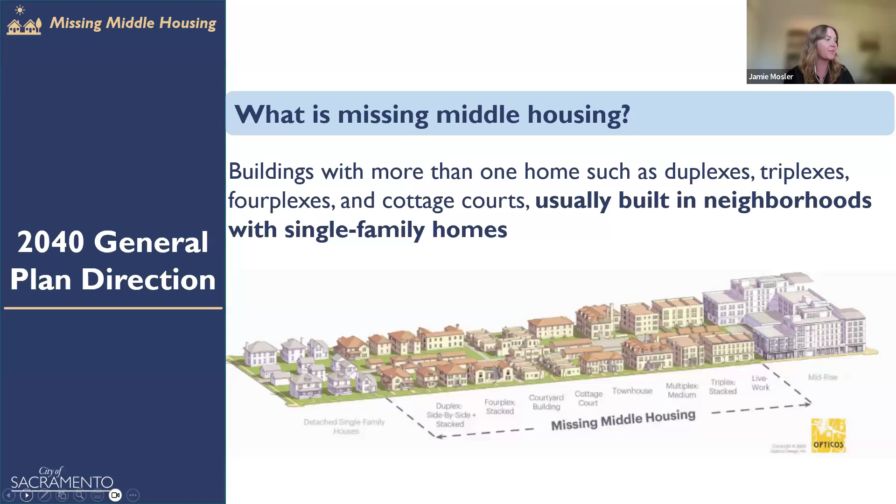We had an interim ordinance to allow missing middle housing that was adopted by City Council in summer of 2024. It was adopted as a temporary step before a complete code update, which we're at now. This ordinance allows duplexes, multi-unit dwellings, and smaller lot sizes in those single unit and duplex zones that I showed on the slide a moment ago.

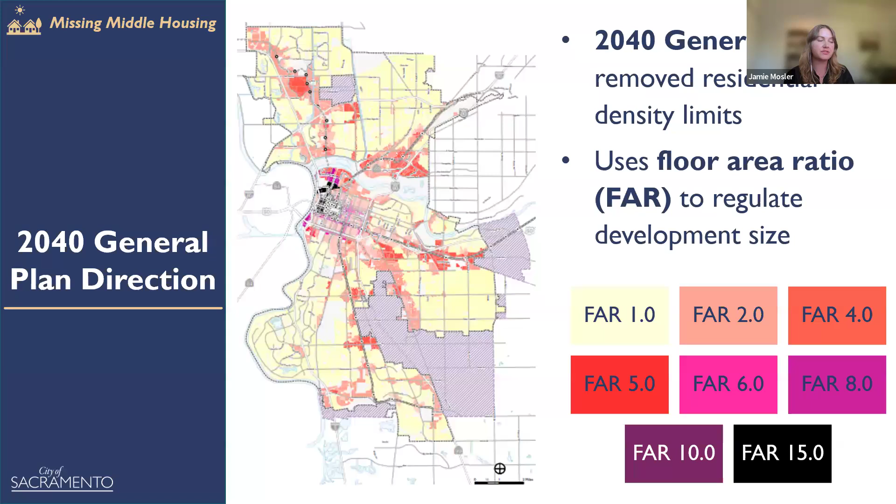But now we're looking at doing updates in line with our 2040 general plan, which removed maximum residential density limits across the entire city. There's no longer a limit on how many houses or units can be built on one lot. The general plan uses floor area ratio instead, so instead of having like one unit per lot, we have FARs ranging from 1 through 15 across the city.

Floor area ratio is building area divided by lot area. So for example, if you had a 5,000 square foot lot with a 5,000 square foot building on that, that would be an FAR of 1. But a 15,000 square foot building on that same lot would be an FAR of 3. So now the general plan regulates the size of the box, not necessarily how many housing units are within it.

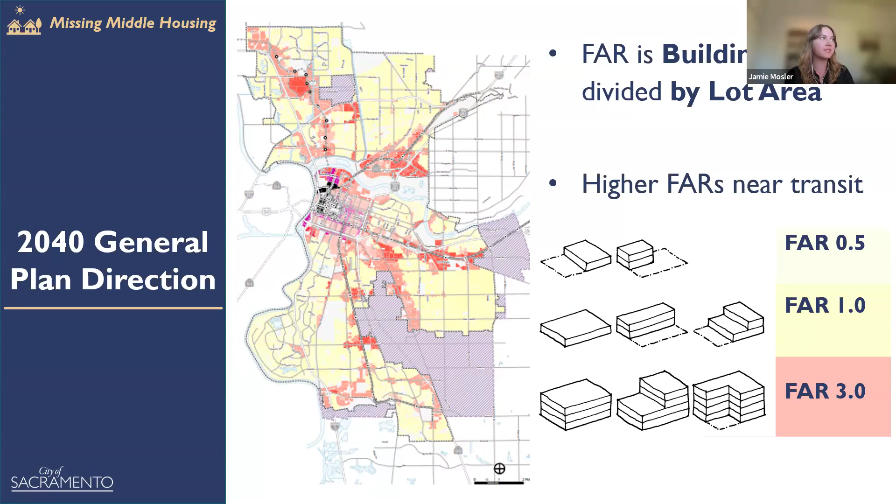The general plan also allows higher FARs near transit. You'll see the lighter colors are further from transit, that light yellow, and our darker colors are along where the light rail is and getting closer to downtown. So higher development intensity is associated with transit.

But when we look at missing middle housing in the areas we'll be talking about tonight, we're looking at parcels that have either a max FAR of 1, mapped there with all of those yellowish parcels on the left—there's about 100,000 of them—and then we're also looking at parcels with an FAR of 2. There's about 20,000 of those, located closer to transit where they have the higher FAR.

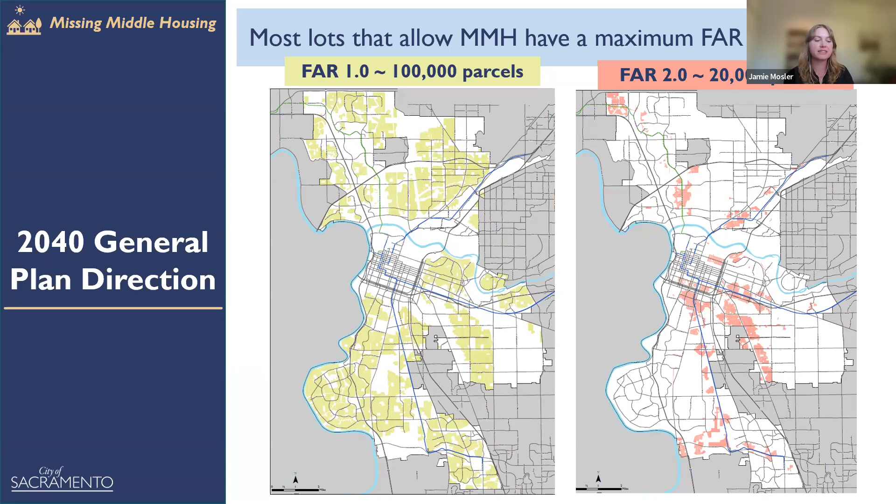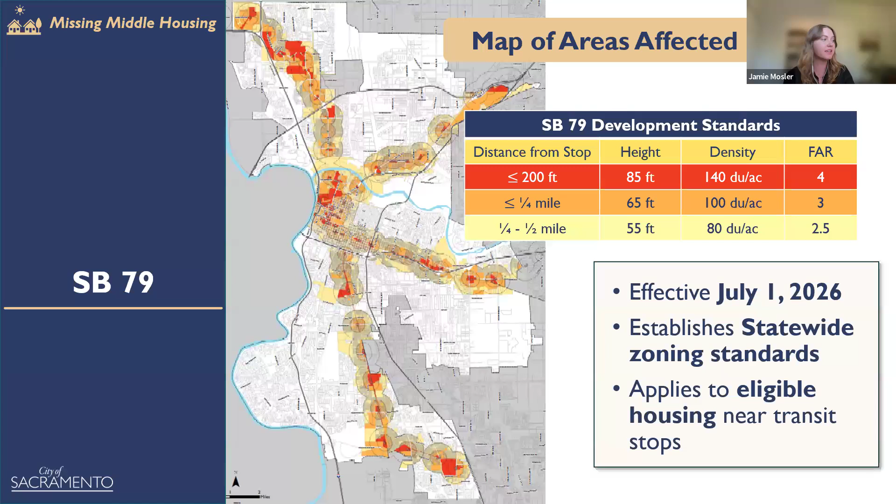The project has to be housing or mixed use with at least 5 units, has to meet minimum density standards, comply with an average unit size, and sometimes affordability and labor standards apply as well. So we're taking direction from our general plan to increase intensity near transit, but also to broaden the range of housing types, and also looking at new state legislation.

We had a workshop with City Council back in April, and now with their direction, we are working on updating our missing middle housing standards to balance neighborhood scale, but also to focus growth near transit and create more housing opportunities in those areas. And with that, I'll turn it over to Tony Perez from Opticos to walk us through the draft standards we've been developing so far.

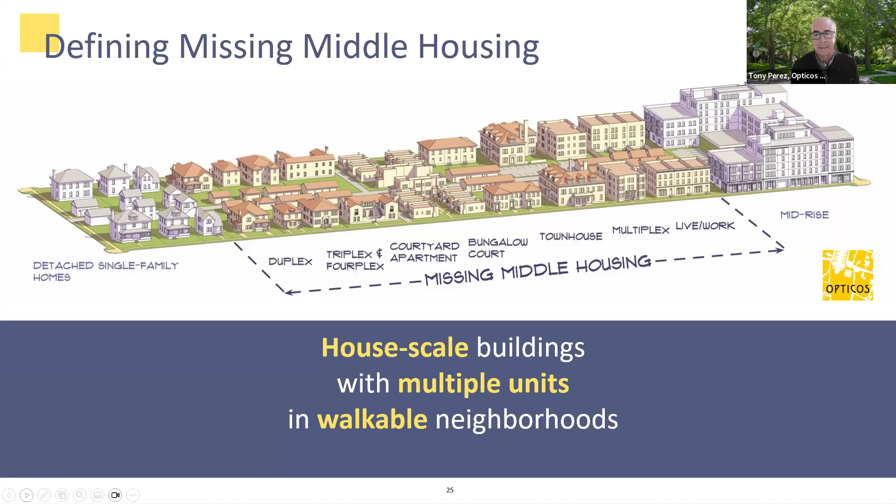And this isn't new. If you're sitting there saying, well, I've seen this, I just saw some examples that Jamie showed from Sacramento that predate all of these discussions, you're absolutely right. We're not saying it's new. What is new, unfortunately, is getting these types to be allowed again across the country, and allowed predictably and easily.

One of the things that missing middle housing is really known for is that it's always been part of neighborhoods. And in being part of neighborhoods, it's often hard to tell if there are 2 or more units in that building, because they're part of neighborhoods that have single unit houses. So here you're looking at 3 mailboxes or 4 water meters or gas meters showing you that there are multiple units in that building. But otherwise, walking along the street, you'd say it looks like a big house.

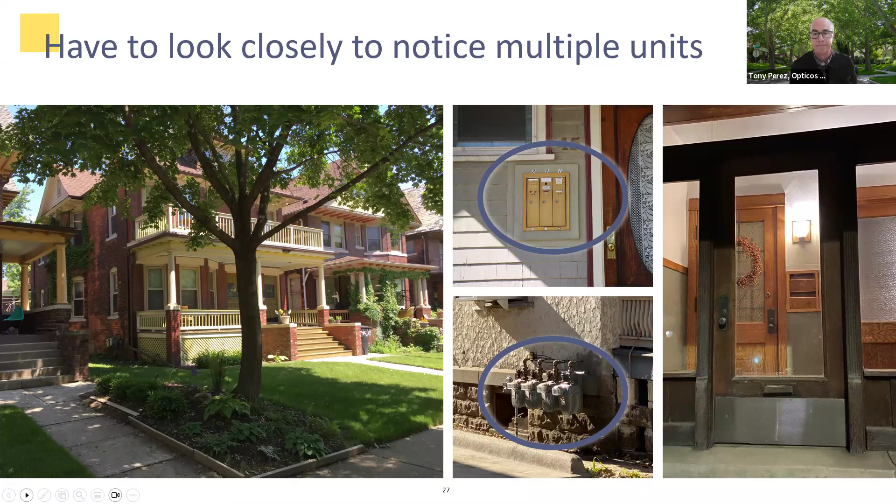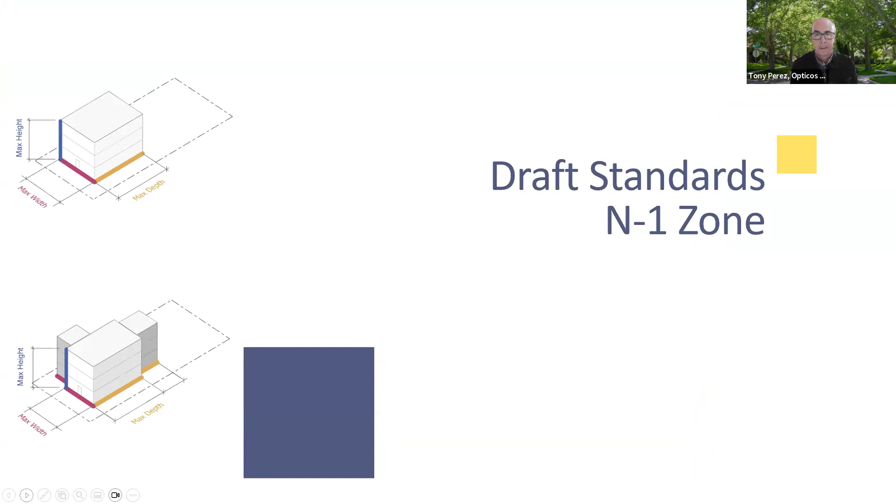One of the things when we approach writing standards is, instead of focusing on numbers and all the abstract things you can focus on, as a team we've reversed that process. Based on the public input received so far and the direction from City Council, what is it that people are looking for besides more housing, and in what forms, shapes, and sizes? So we started with that and then worked out the numbers that supported those outcomes.

An example of an outcome like that is this multiplex. It's a 3-story sixplex that fits in this neighborhood.

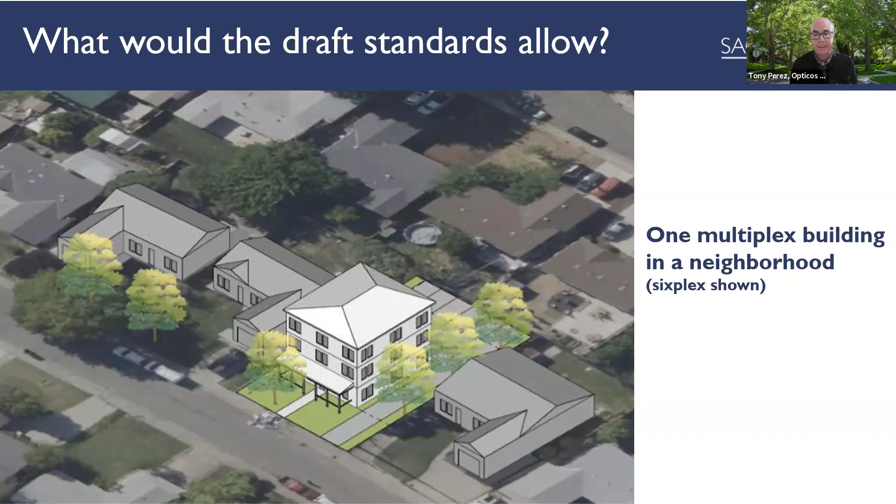Here's a version in a 1.0 FAR area. The previous one was also a 1.0 FAR area, and this one is 6 single-story cottages, as I was mentioning earlier in that cottage court type, with a 2-story duplex at the far end of the garden. This produces 8 units on that lot.

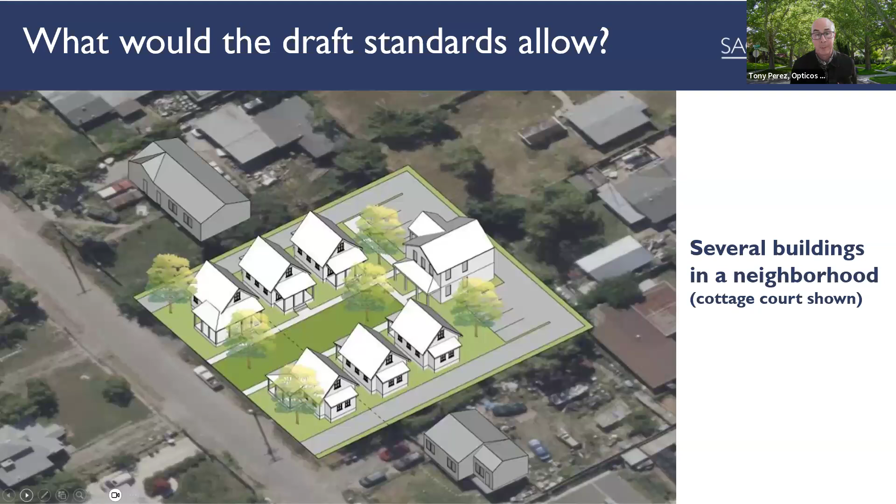Then in the 2.0 areas, there is a lot more floor area to achieve and more housing expected to be achieved in those areas near transit. So in this case, we are showing a 4-story building, and you can see how its width is similar to the buildings I've been showing you, but its depth is much deeper, as I was mentioning in the upper missing middle. They're deeper into the lot.

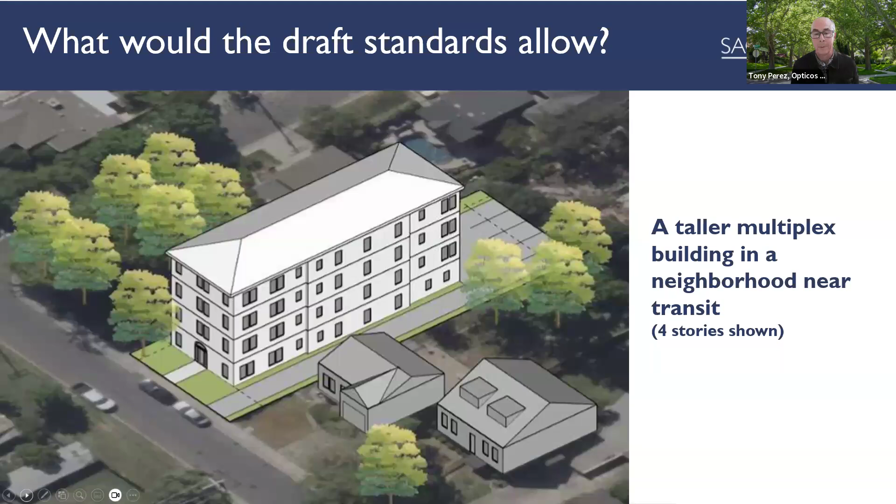Looking at these closer, the first one, the 1.0 area sixplex, a three-story sixplex, you can see the interim ordinance standards on the left. The three examples I'm going to show you: the interim ordinance currently in effect is in the left-hand column, the proposed N1 standards are in the middle column, and what you're looking at on screen is reflected in the shown column. So when you study this information later at your own leisure, you can use this structure to look at it. You can see here that in this example, the height is not changing.

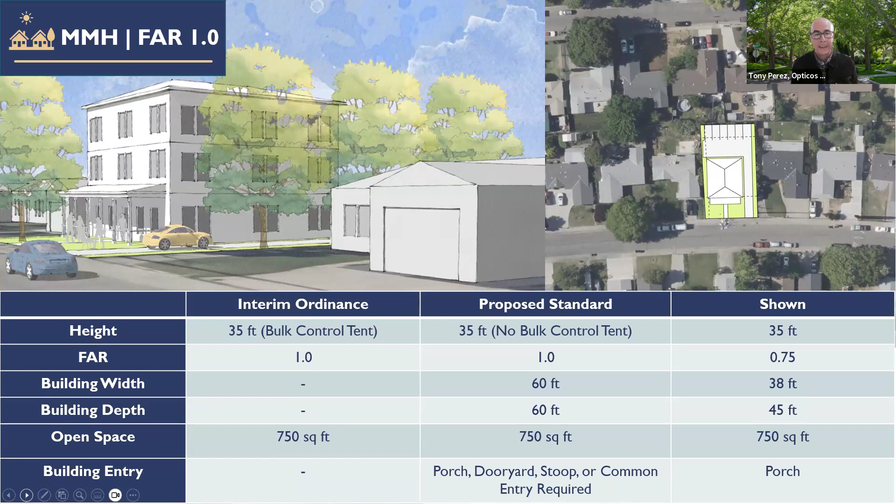But the bulk control that currently is in the interim ordinance is being removed, and so the building is able to achieve 3 stories fully without any hindrances to the floor area, and it can produce 6 nice units in that building with parking in the rear, as you can see on the site plan there. It also has open space in the front in the form of a front yard, with a porch added as a feature.

In this one, this is a version of the cottage court I showed you earlier, but it's 2-story cottages around the entire garden as opposed to single-story cottages. You can do either one or mix them. We're just showing it for variety. But again, the height in these areas is not changing, but the bulk control is being removed.

So these buildings can function as complete buildings without any hindrance from bulk control. You can see that the height these buildings need to do that is well within the 35 feet that's allowed by the interim ordinance and the proposed standards. And you can also see that the open space required in the proposed column is far exceeded in this actual example because of how the garden is oriented on the site.

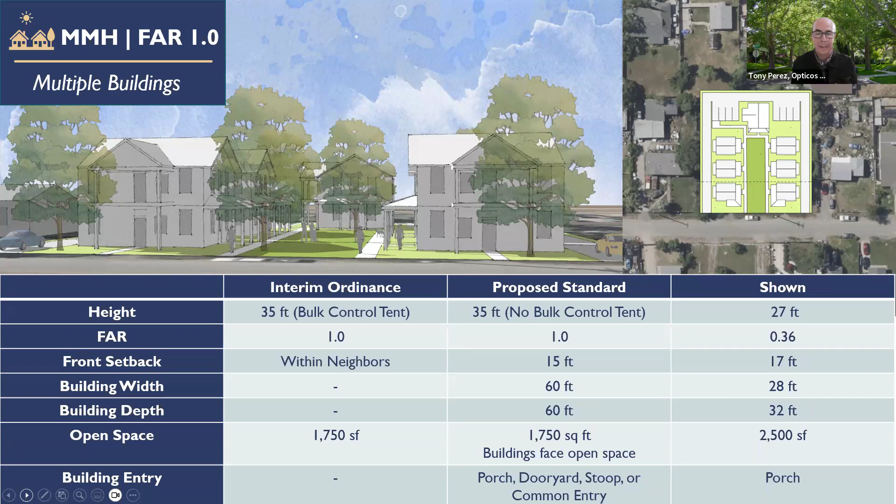Then the third example, that 2.0 area building, this building is enjoying more height because the interim ordinance currently controls it to 35 feet. Again, per council direction to achieve more housing, we are increasing the height in these areas to 45 feet and removing the bulk control requirements.

So this building is able to produce 4 stories and anywhere between 12 and 16 or 18 units, depending on how you divide the square footage inside.

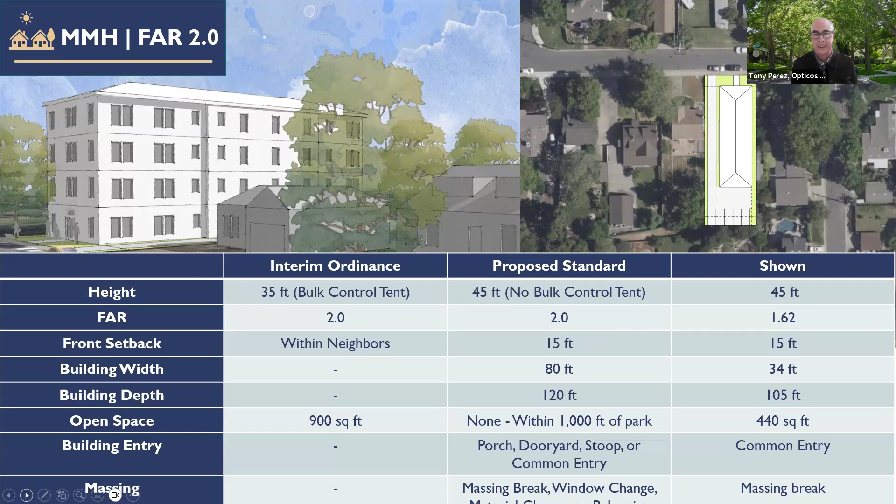And as long as it doesn't exceed 20% of the maximum height, and that's easy to do with that number, the intent is to provide for the ability to have a pitched roof, but not require it.

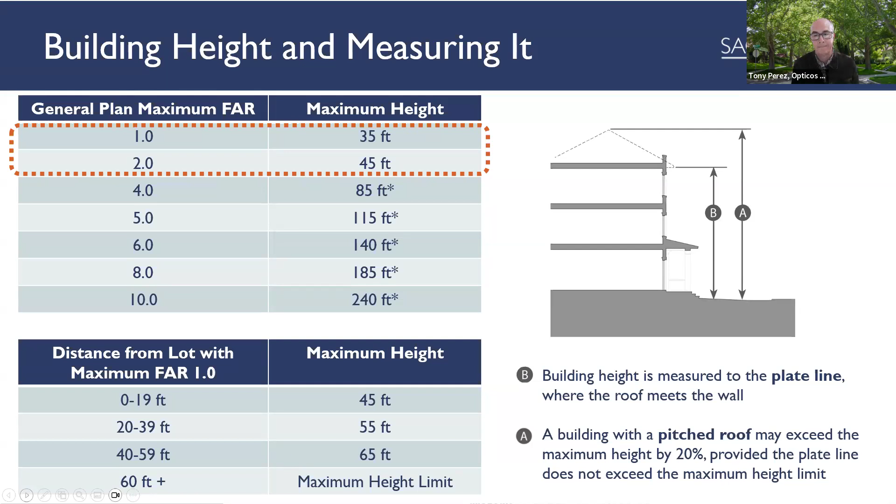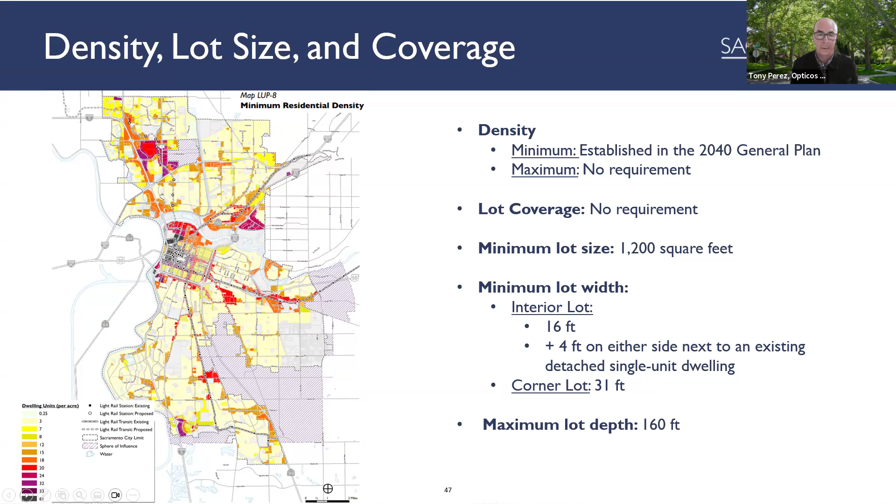As Jamie mentioned, density limits have been removed, lot coverage requirements are removed, and the lot size requirements you can see on the screen. I'd summarize the lot requirements by saying these standards are worked out to function on all the existing lot sizes that exist. It takes a lot more work to make sure that everything works, but that's the way to do it instead of hoping that people assemble properties to make projects work. So these standards work on the properties that exist.

Building setbacks is what we're going to go through next. On the left-hand side, if you're going to build up to 2 units, you can see the setback requirements depending on what exists on that block. But at most, it's going to be a 20-foot setback, which is typical with the houses in most of those neighborhoods where these would be allowed. If you're doing 3 or more units, then it's 15 feet.

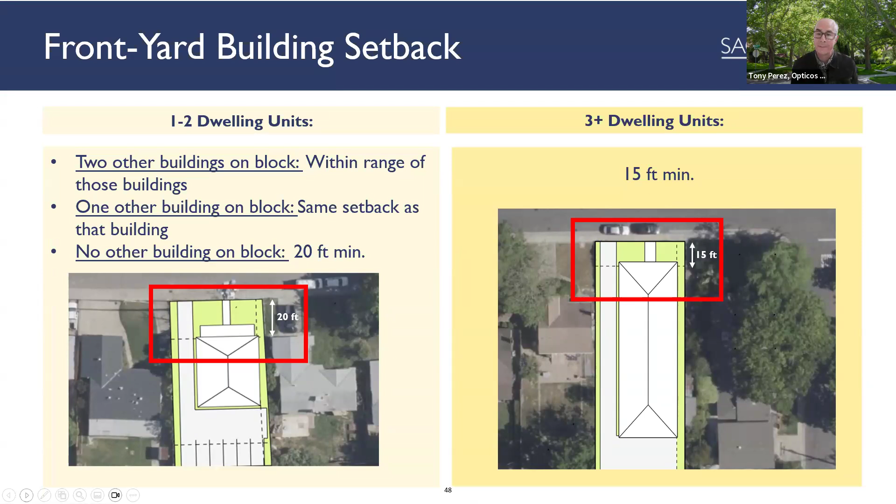Street side yard, that's the side of the lot on a corner lot. You can see here it's 12.5, which is the current requirement, as I understand it.

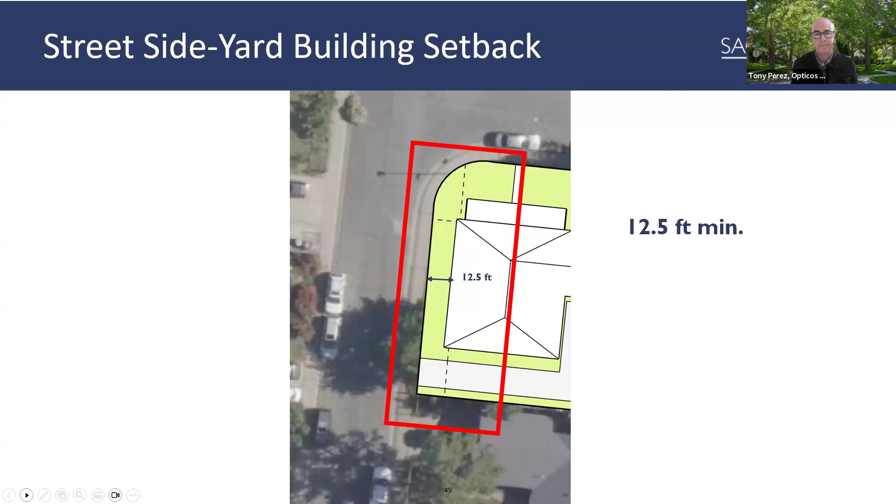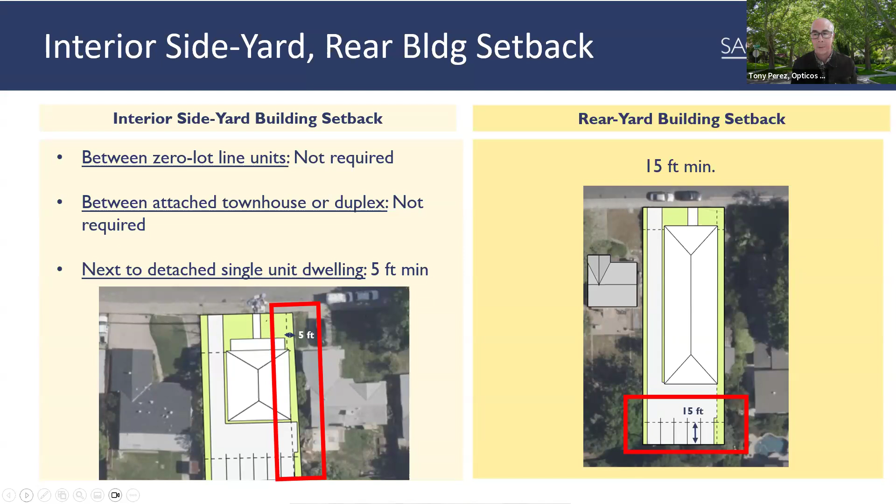Then side yard, interior side yard and rear. In the interior side yard on the left, depending on what you're building and what you're next to, there might not be any requirement, but chances are there's probably a house next door, and if there is, it's a 5-foot minimum setback. The rear setback is simply 15 feet.

So massing, the next area of requirements. The massing requirements for 1.0 areas are very different than the massing areas for 2.0 areas. I'm going to talk about the 1.0 areas first. The idea here is that because these buildings are fitting into neighborhoods of houses where the intensity isn't as great as in the 2.0 areas near transit, the idea is to achieve a neighborhood scale balance in terms of building size, to use the term Jamie used earlier.

One way to do that is to limit the building length in either direction. We've found that 60 feet accommodates a lot of different sizes of buildings that fit on these lots, as you'll see in the slides that follow. As an example, the photo at the bottom left represents a building about 60 feet wide. Could it be 62? Maybe. I didn't measure it exactly, but my recollection is this building is very close to 60 feet wide. So you can see how wide of a building this accommodates, even though the diagrams tend to give a different picture because of just how they were drawn. That's why I included the photo at the bottom left, to show you visibly what a 60-foot wide building looks like.

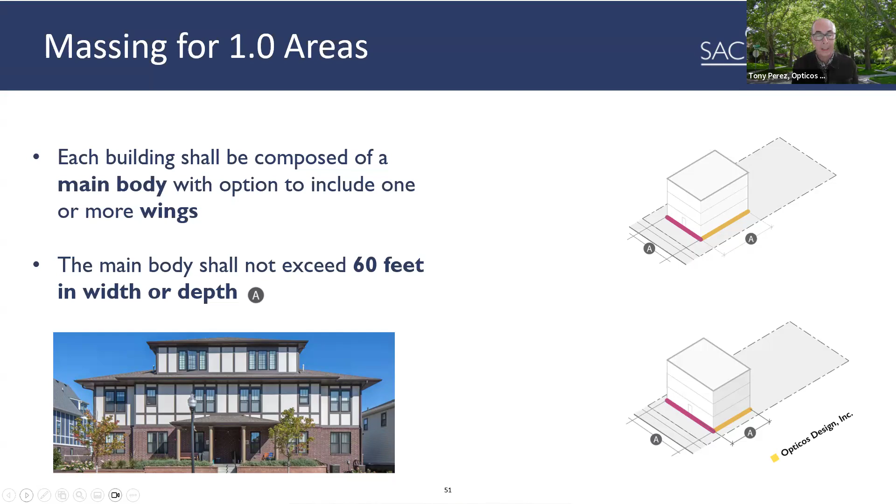As an option, not a requirement, if your lot has more width or depth and can accommodate more than 60 feet, then you have the option of adding one or more wings. Wings are these secondary volumes or additions you can see here in gray in the diagrams. What those let you do is add 1 to 3 more stories in these 1.0 areas, adding more square footage and more units, but doing it in a way where that main body, identified by A, still stands out as the main part of the building. The other parts are offset from the facade by just a few feet, 3 feet, so that the main body reads as the main part of the building and the other part reads as an addition, making for a better neighborhood balance with other buildings in the neighborhood.

The other thing to note on this slide is the last proposed requirement, that all stairways be located inside the building. Regarding the threshold—could it be 16 units, could it be 20 units—we're certainly open to input on all these numbers and all these requirements.

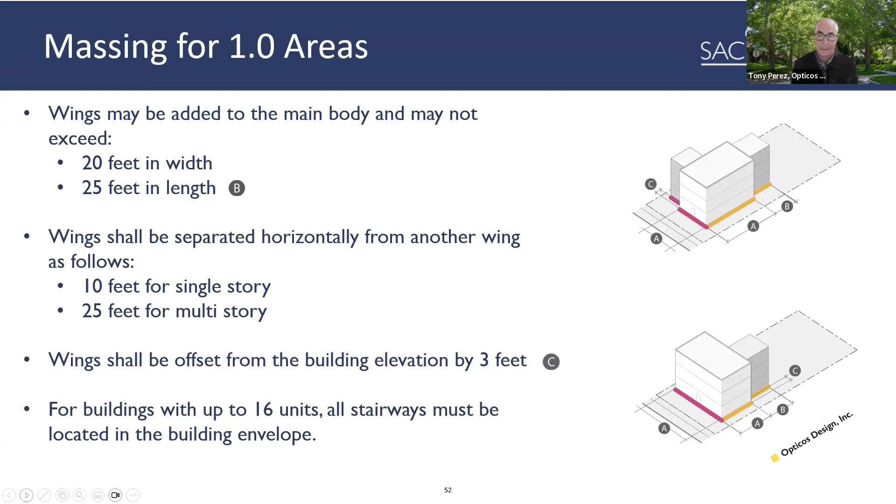The idea is that we've found when fitting buildings into neighborhoods that exterior stairs on the sides and fronts tend to evoke images of apartment building projects that may be nice in other contexts, but in neighborhoods often face resistance because people feel an apartment development is coming, with all the associated number of units and buildings. So we found that requiring stairs to be inside the building does not give that same impression. The buildings we're showing you tonight all have interior stairs. I wanted to give some background on that intent.

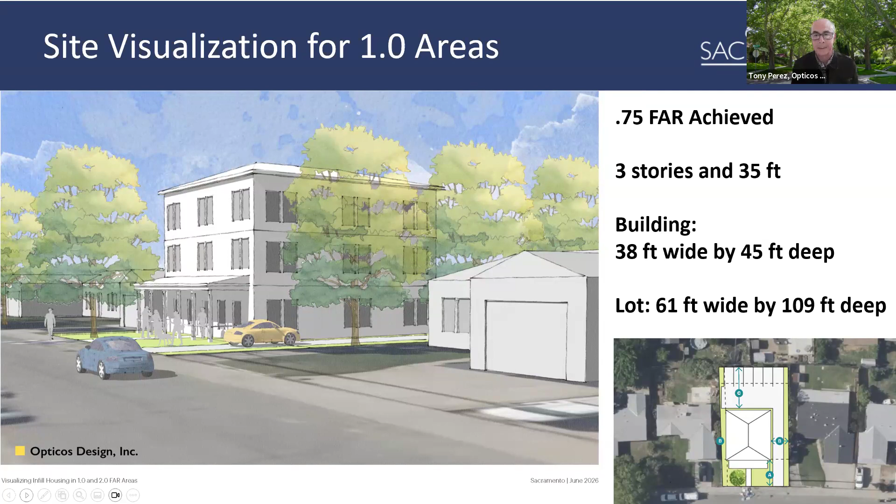Massing in 2.0 areas is very different. The idea in 2.0 areas is to achieve even more housing because these areas are closer to transit, so the expectation is higher in these transit-proximate areas. In these areas, buildings can be much wider than in the 1.0 areas. In 1.0 areas they're up to 60 feet wide; in 2.0 areas they're up to 80 feet wide, and can be up to 120 feet deep, as I mentioned earlier with the upper missing middle category.

One of the standards we're recommending is that buildings over 75 feet long—if your building was 74 feet, you wouldn't have to do what I'm about to describe—but if it's 75 feet or more, up to 80 feet, then one of five massing option choices needs to be applied to the building.

The first one is a massing break: you can either recess into the building or project from it. What's shown here in the area identified by B is a projection of 1 foot by 30 feet long. The idea is that instead of recessing and affecting the floor plan inside and the yield of housing units, a 1-foot projection still works on these narrower lots. It gives you a massing break without hurting the floor plan inside or lowering the yield of housing.

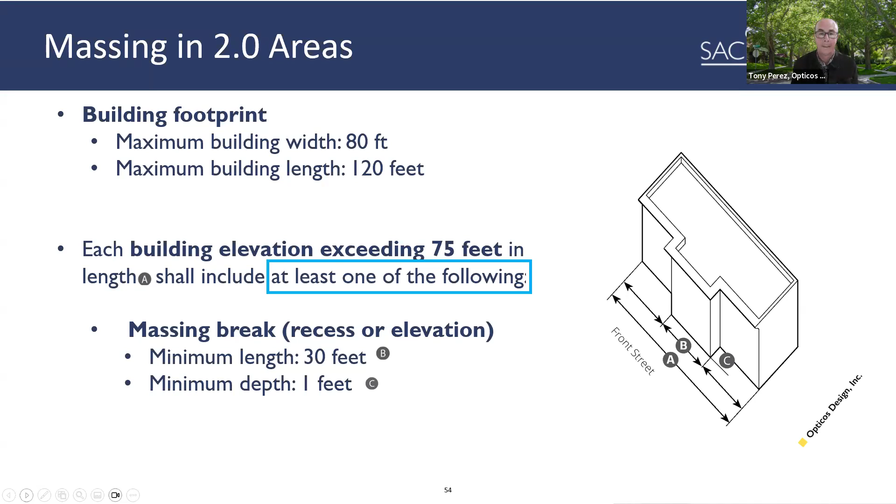So here are 2 more of the 5 options. If you don't want to do the projection or recess I just described, another option is to change the window proportions, or window sizes. You can see in the middle of this diagram the windows are taller and a bit wider than the windows to the left and right. The requirement is just 3 inches—we're showing it larger in the diagram to make it clear for viewers, but it's just 3 inches that's required.

Another option is to recess the windows. You can have all the same windows across the facade, but you need to recess them 3 inches from the main wall.

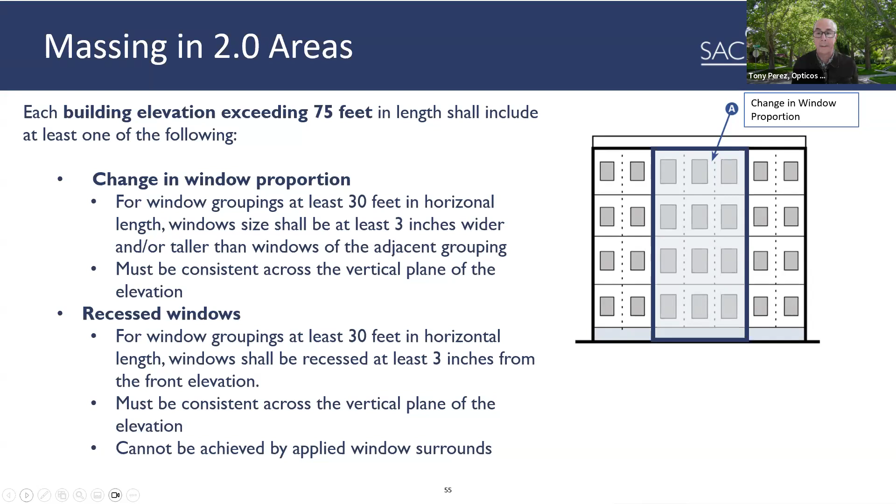The other thing here is that if you want occupiable balconies, where somebody could sit out there and occupy the balcony, then we're recommending that a setback of 10 feet be required so that it would minimize overviewing onto other properties.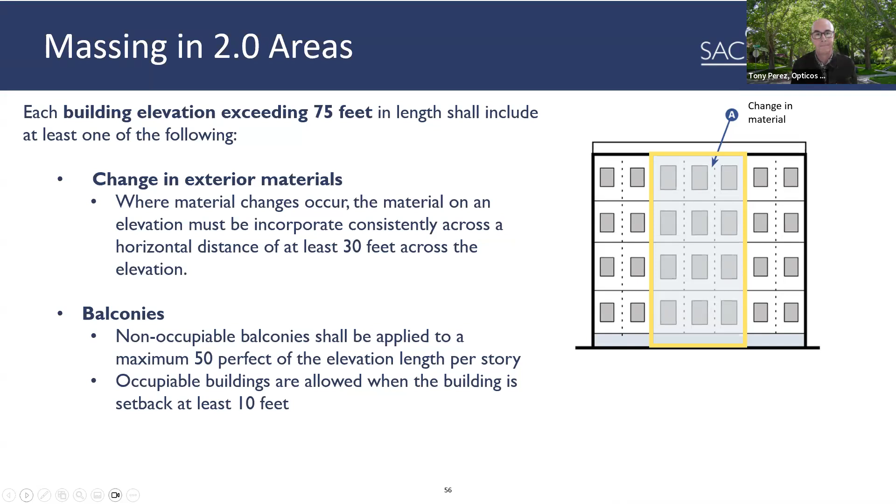So here's a visualization of one of those 2.0 area buildings. You can see how much deeper it is than the first building I was showing you in the 1.0 areas, and obviously 1 story taller with 4 stories. You can see that massing break, that projection of 1 foot applied.

And in this case, we're showing also a change in window proportion as well, even though just one of those two techniques would be required, not both.

But on this lot of 55 feet wide by 160 feet deep, a 1.62 FAR is achieved in 4 stories. And there's parking in the back. You can see surface parking, and then there's tuck under parking in the rear of this building.

More units could be achieved if the developer wanted to divide the square footage a certain way, but we were assuming about 1,000 square feet, somewhere a little under that. So anywhere between 12 and 16 units could fit here comfortably in this building, if not more, depending on unit size. And then balancing the parking - there's no parking requirement, but we have been using the term expected parking in terms of some developers wanting to provide parking. So what might that be? This is a scenario assuming parking spaces at about 0.6 space per unit.

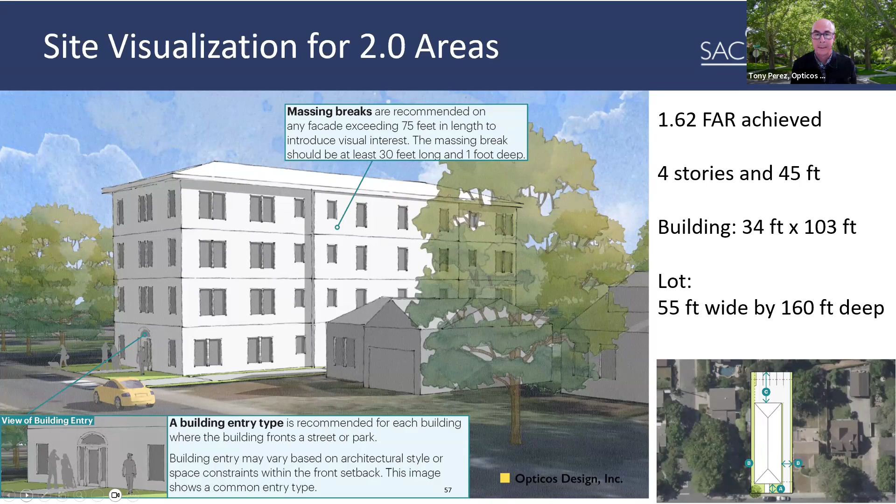So then the next set of requirements is addressing the streetscape or the public realm, as some people call it. These requirements require that at least one entry from the building face a street or required open space. And these standards provide 4 options.

There's the porch, in the top left photo. It can be single story or double story, as in this example.

There's a dooryard, which is another way to say an at-grade patio with a little low privacy fence there to provide the semi-private area in front of each unit facing the street or an open space. Or a stoop, a semi-private area where somebody could put a chair out, hang out there and watch people go by, just a little elevated from the street in exchange for being closer to the sidewalk.

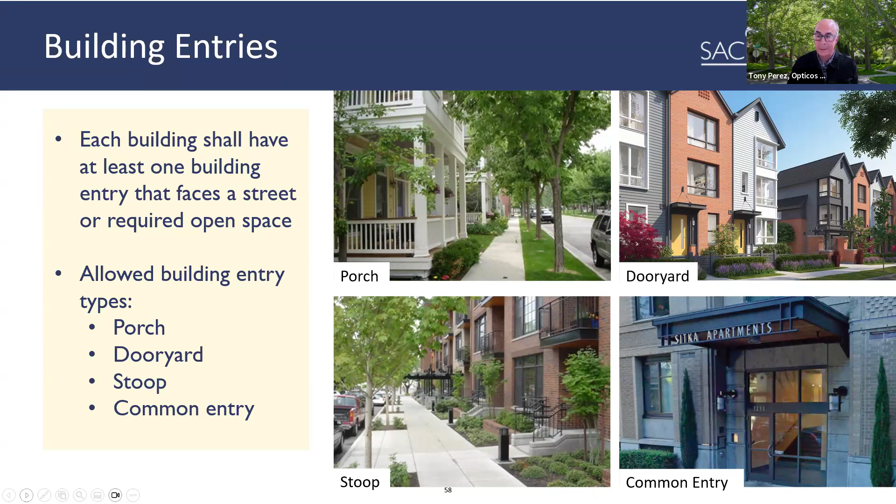And then the fourth one, the common entries. Some buildings, as I was showing you in the last site visualization, use a common entry where all the units are entered through a small lobby and they enjoy this shared entry that gives identity to the building and also gives coverage during bad weather.

The requirements here on the right show the width minimum of 8 feet and the depth clear of 6 feet. The idea is that you can make it bigger if you'd like. Some of the examples I was showing were a little larger, but the idea is that the space be functional to sit in, to be able to hang out there and enjoy the streetscape, which is the point.

Often you've seen these kinds of elements added to buildings without these kinds of requirements, and what happens is the element is added in name but not in function. So people tend to not use those spaces. I mean, would they sit out there anyway if it was shallower? Maybe, I don't know. But they definitely get used when they're sizable enough to have furniture, a chair, or maybe an all-weather sofa out there, encouraging street interaction as well.

A lot of requirements in cities don't distinguish between these elements and the building, so they treat these elements as the building setback. What happens is the whole building gets pushed back into the lot, reducing housing yield. In this case, Sacramento is proposing that that not be counted toward the building, so you can see the area A times B there - the porch, dooryard, or stoop, whatever it is, is actually not counted, and it can project from the building facade, which is at the minimum setback, and it's allowed to project into the required setbacks, as you can see there on the bottom left.

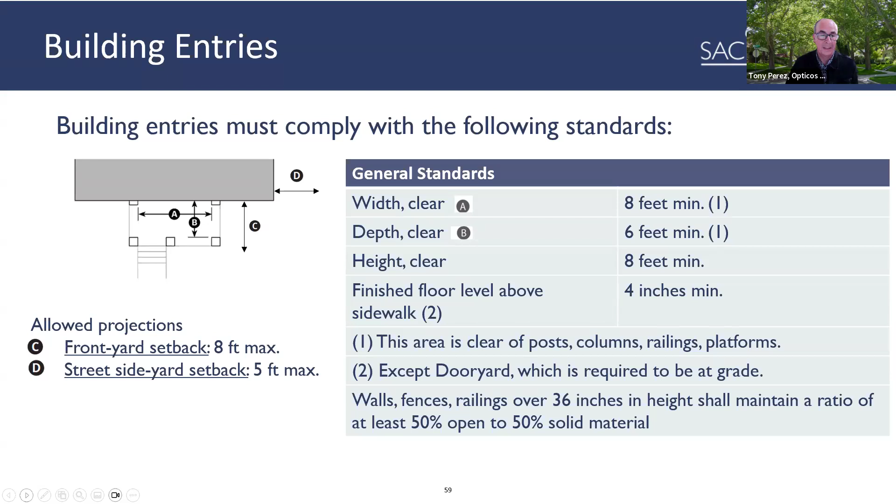Vehicles and parking. The biggest thing here is that we are making a distinction between the needs of circulation and parking on a lot that holds one or maybe two buildings at the most, as you see here on the left, and the needs of parking, circulation, and on-site access for emergency vehicles on a parcel as big as the one on the right.

Often public works and driveway requirements don't make this distinction, so it's very difficult to redevelop smaller lots like the one on the left. City staff is still evaluating these reductions to the driveway width requirements, but it's heading in a good direction to make these distinctions as we're seeing here on the screen.

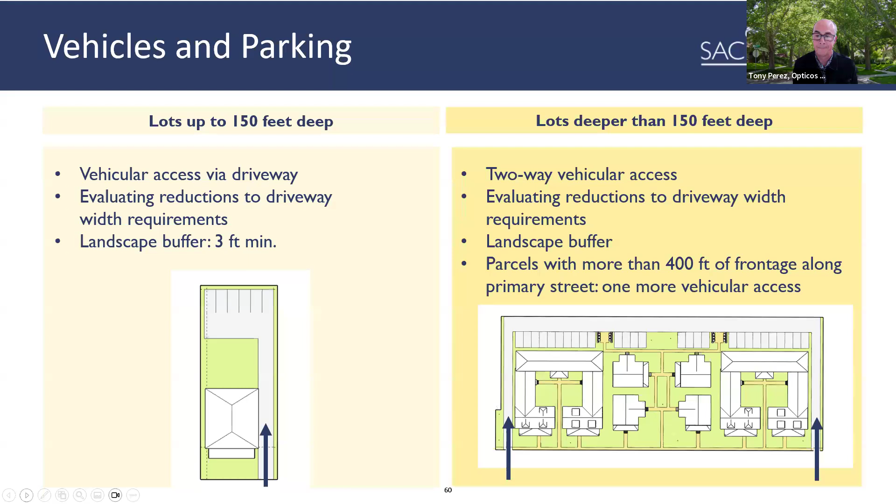So, multiple buildings on a parcel. This is a topic that gets talked about all over the country because, for all the reasons you know about producing more housing, more buildings sometimes fit on a parcel, but they don't always get fitted the best way they could have been to make a nice space and add more to the neighborhood.

The requirements we're proposing basically locate parking away from the street, at least 50 feet from the nearest street. You can see here it's actually in the back. The driveways for this cottage court access the parking in the back, and then the buildings are oriented around a shared space and toward the street. The requirements spell all that out.

Here you can see there are 5 two-story duplexes arranged around this garden, producing 10 units very nicely on this site.

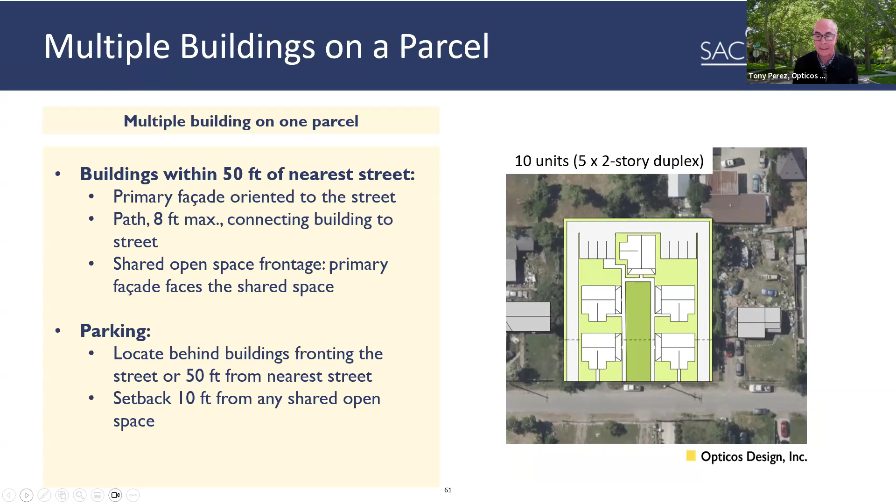Here's one of the outcomes we're trying to avoid, just one of many examples. This isn't in Sacramento, but there are examples like it all over the country where the applicant was entitled to fit these 5 buildings on this parcel, and this is what they did, and they still met the requirements. As I mentioned, one of the key requirements to apply is the location of parking. You can see on the right what the proposed standards would produce, and on the left what they would avoid.

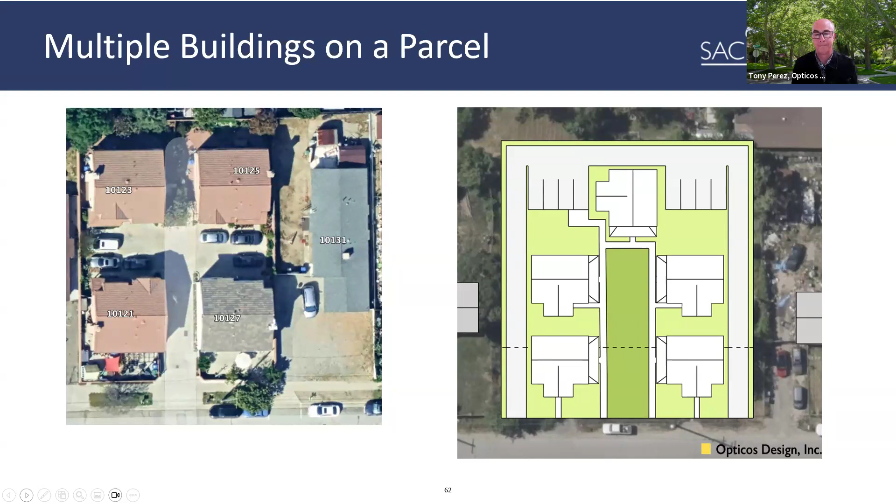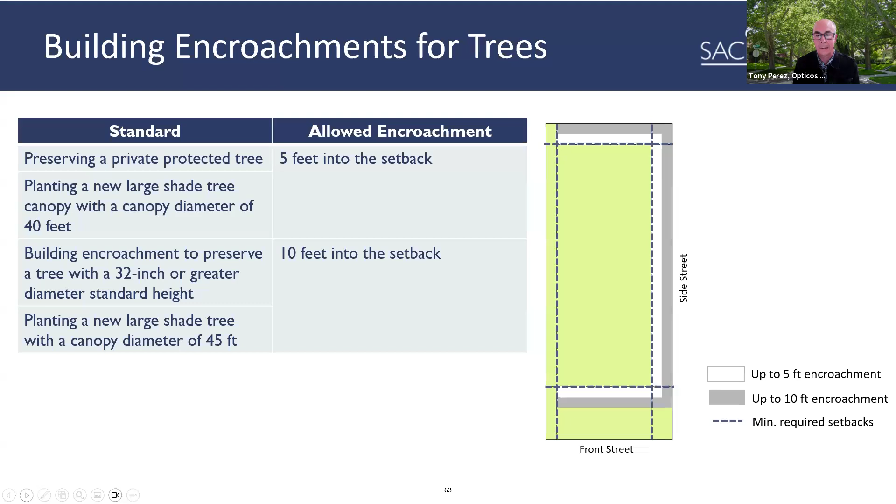So trees - the idea here is to provide flexibility in the standards when a tree of a certain size is being protected. Depending on the size of the tree, or if you're planting a new tree of a certain size, you can encroach a certain amount into the setback, either 5 feet or 10 feet. That's a really nice piece of flexibility that's needed because preserved trees exist in areas where it might not work out to meet all the standards, so this provides flexibility to do that.

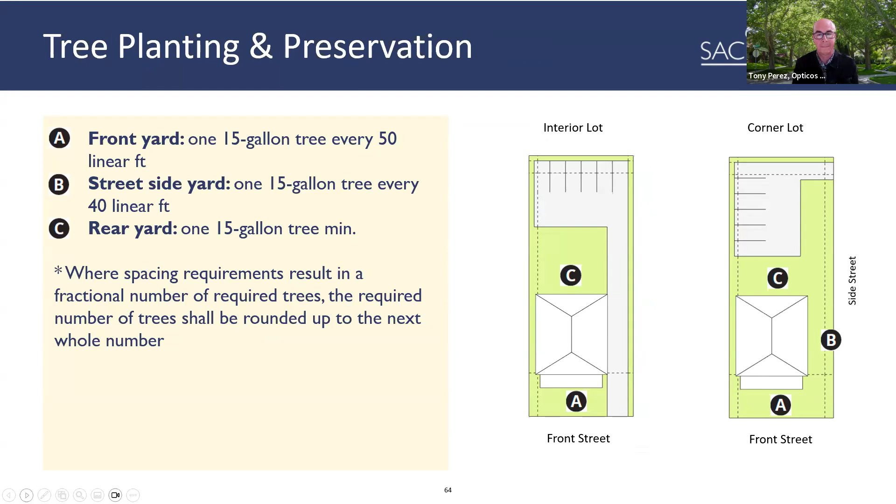So open space - the idea here is that if you're within proximity, and in this case we're proposing 1,000 feet, that's a short 3 to 5 minute walk depending on your pace. If your lot is within 1,000 feet of an existing open space - not a school playground that's closed off to the public, but an actual open space, a park - and we're not saying how big that park has to be, it just has to be an existing open space - if it's within 1,000 feet, you don't have to provide any open space.

If you're not within 1,000 feet of open space, then the requirements here are on the left. In 1.0 areas, you would need to provide 125 square feet per unit, or 400 square feet total. In 2.0 areas, it's 75 square feet per unit, or 400 square feet. So love your feedback on that as well.

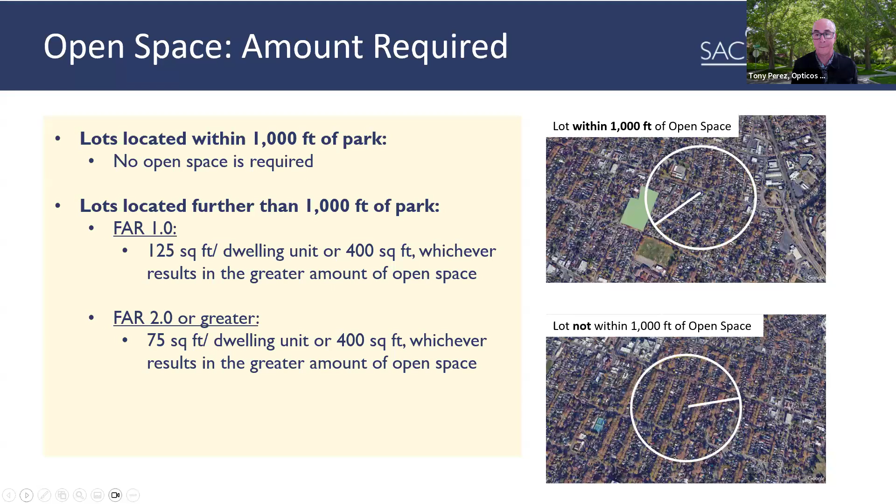So then the location of open space - here's that cottage court example again. A lot of times open space gets distributed across the site in the name of making it interesting in the site plan, or providing it near everybody's unit in a different way. But the requirements really encourage aggregating the space when possible, so it can be shared and viewed in this way of a cottage court. It's not the only way, but this is a great example of how to do that.

Another part of the requirements is that the space be open to the sky and not under covers or other hindrances to sunlight, and that it be planted in the ways you see there, with the features listed on the screen. Next slide.

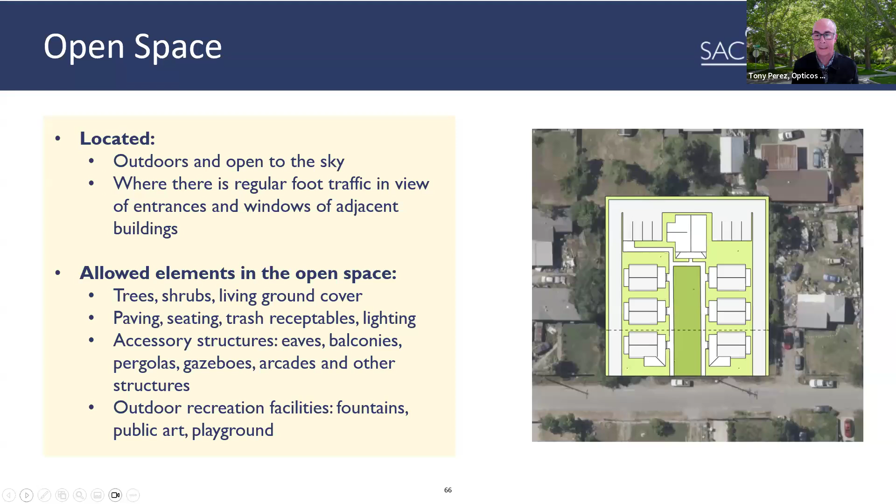Depending on where you're locating your open space, the requirement varies accordingly. If you're placing it in your front yard, it has to be at least 15 feet deep. In a street side yard, 10 feet. Interior side yard has to be at least 10 feet wide. Rear yard, 15 feet wide. Next slide.

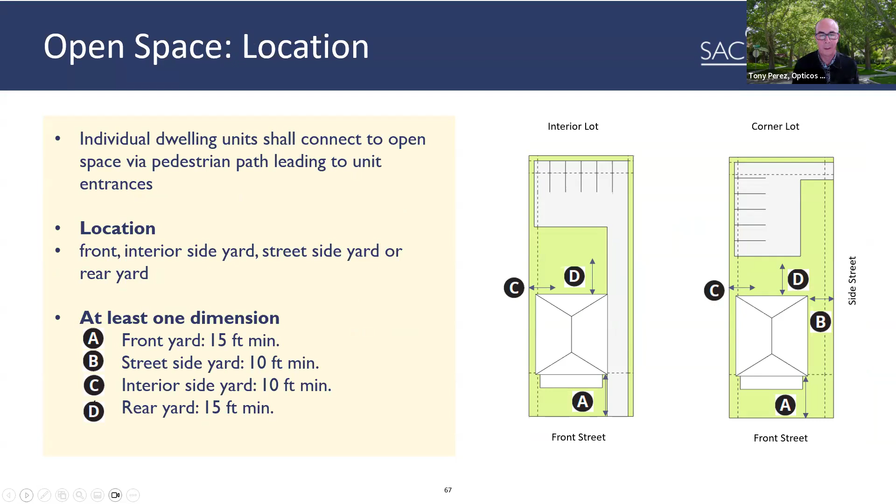Balconies and roof decks are not required, but if you want to add them to your building, these are the requirements for balconies and for roof decks. They mainly have to do with where they're located on the building, depending on what it's near. You can see balconies on FAR 2.0 sites - balconies are proposed not to be allowed where abutting a 1.0 FAR site, again for overviewing concerns.

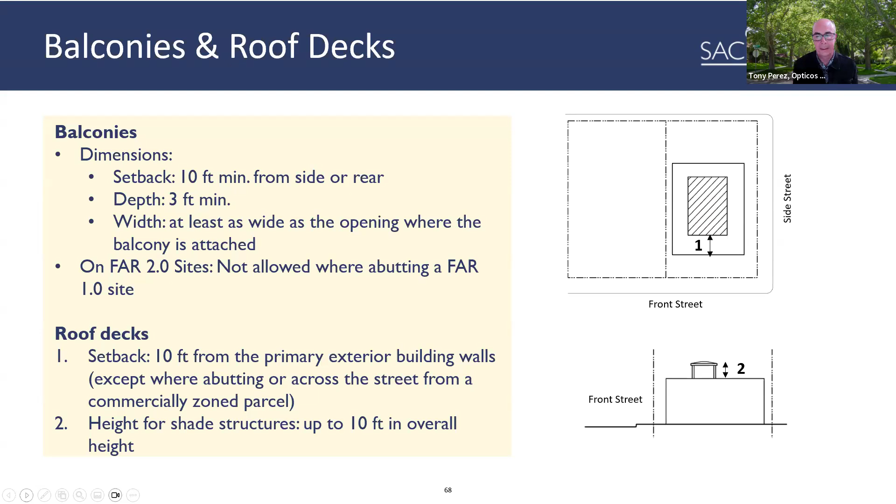Next slide. Summing up with these three examples, the site visualizations we prepared both informed what the standards needed to be to produce these outcomes, and helped us understand where standards needed to be finessed or adjusted. You can see here this 1.0 area with a three-story sixplex fitting in nicely, with a beautiful wide front porch facing the street and providing an area for people to hang out and enjoy the streetscape. Next slide.

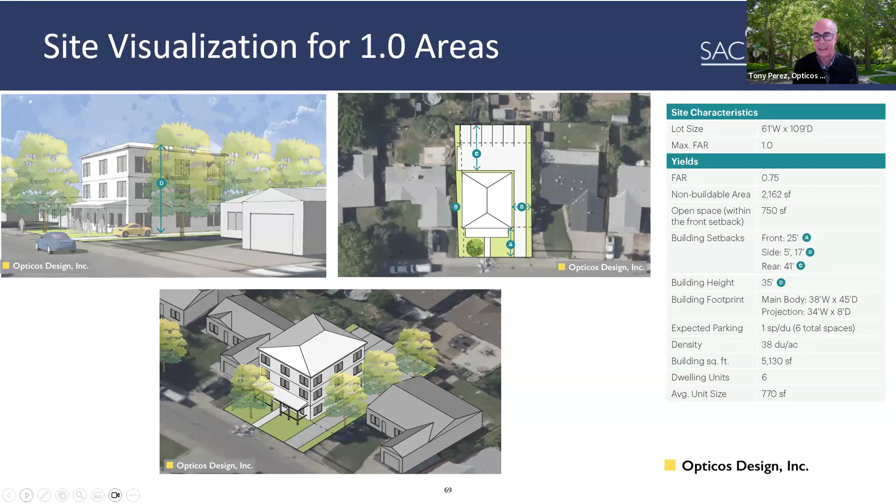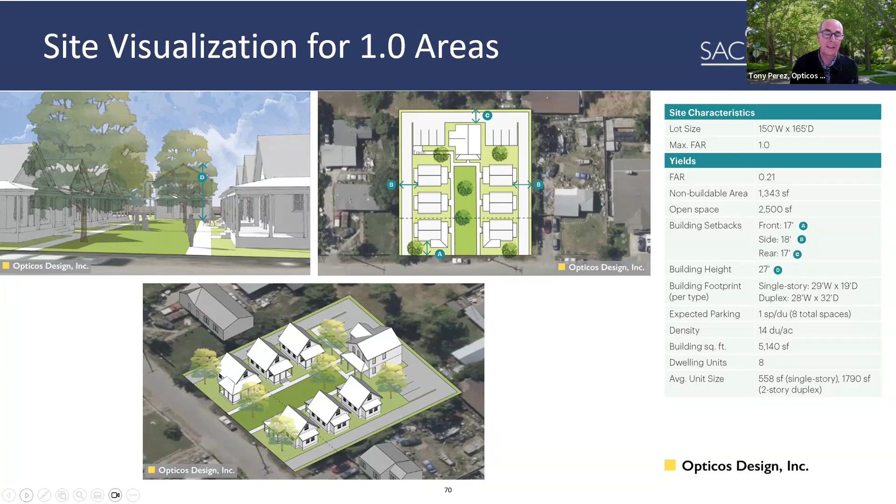This cottage court - in the top left you can see the one-story version with the two-story duplex at the end of the garden. That garden might not be big in terms of what people think of as a park - it's not a park, it's a garden - but it gives a really beautiful address inside the lot to the buildings that face it, and a feature for the pedestrian walking by who can see the garden inside and look across it and enjoy it. Next slide.

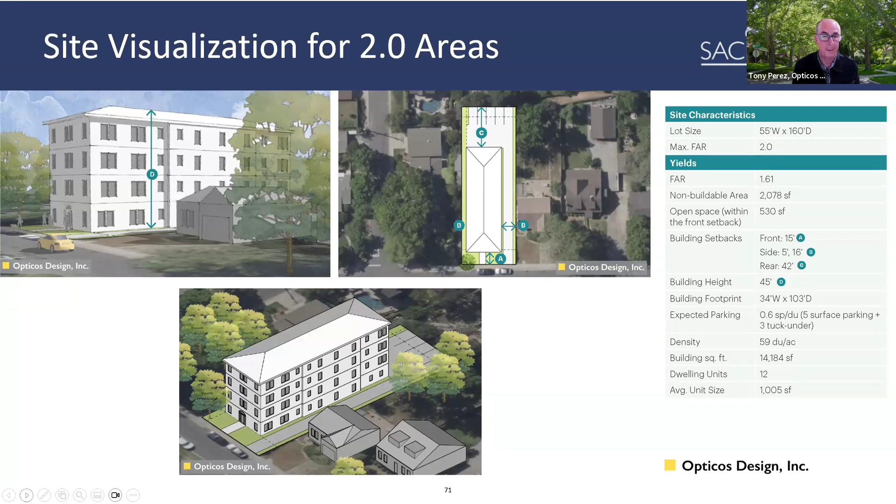The 2.0 visualization - this parcel is 55 feet wide by 160 feet deep, and it yields a building of 4 stories in a transit-proximate area. As you can see, that upper missing middle scale goes far deeper into the lot than the other end of the spectrum. So that's it. Thank you for your attention on the standards and the summary of this. Look forward to your comments.